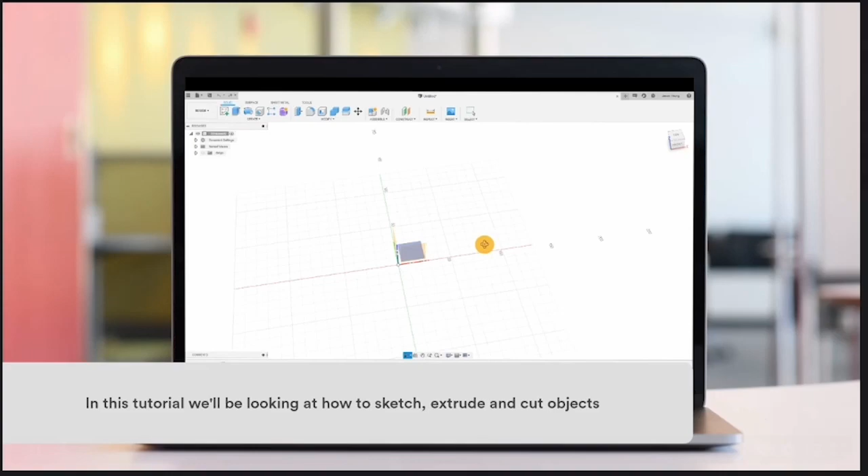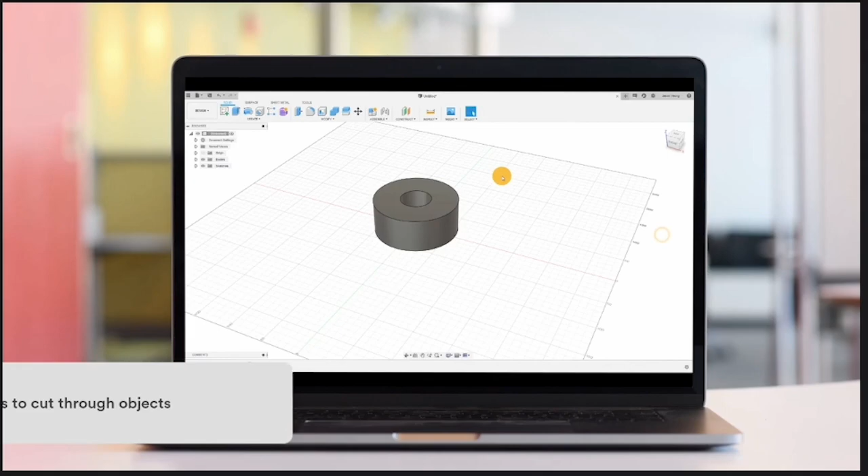In this tutorial, we'll be looking at how to sketch, extrude, and cut objects. Alternatively, you can extrude sketches to cut through objects. You're now going to follow a set of instructions to use sketching, extruding, and cutting to design a wrench to fit a nut and bolt.

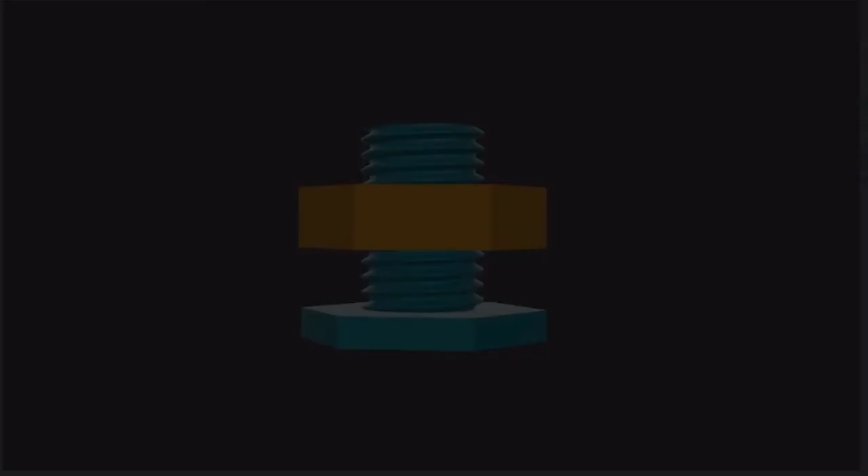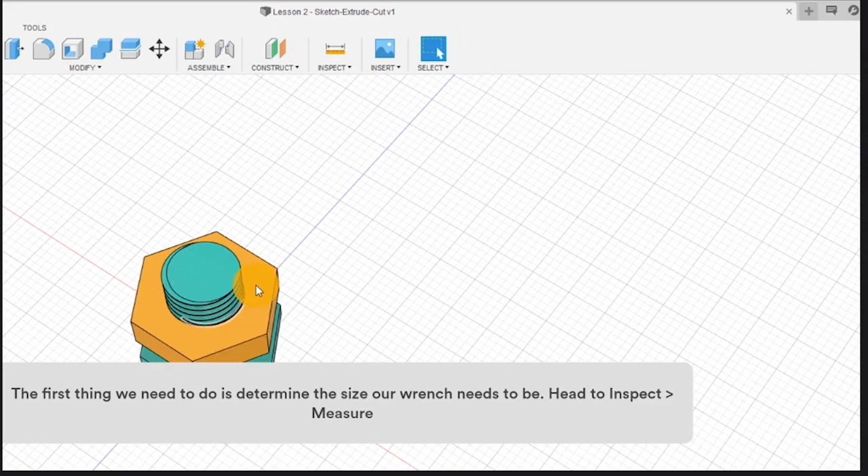Begin by opening up the Lesson 2 file. This is the nut and bolt we'll be designing a wrench for. The first thing we need to do is determine the size our wrench needs to be. Head to Inspect, Measure. Now click once on opposite sides of the nut. The distance between them will appear in the Measure menu, and it's 15 mm.

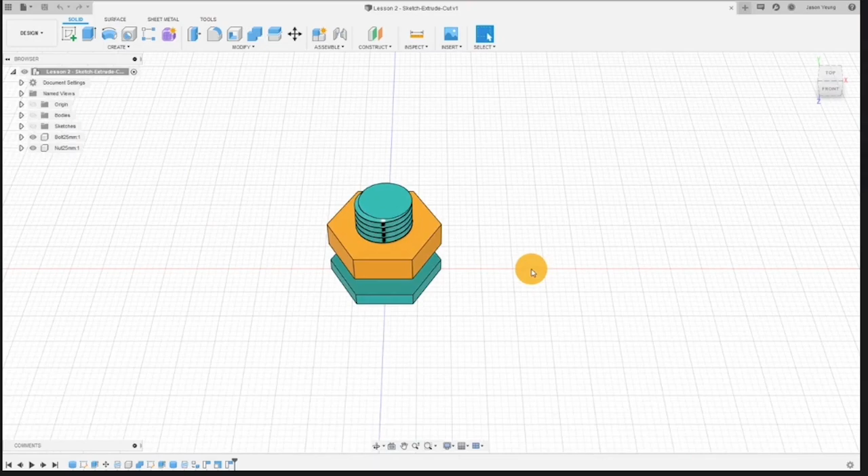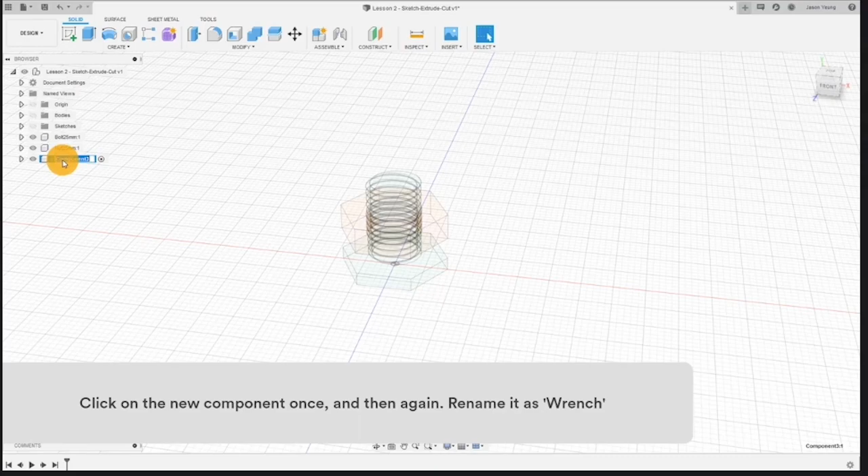In the browser menu, you can see there are two components, one for the nut and one for the bolt. Let's make a third one for the wrench. Right-click on the top component and select New Component. Click on the new component once and then again, and then rename it as wrench. You might notice that the timeline is now empty. The timeline will show previous actions on the component that is activated. Ensure the wrench component is activated and toggle the visibility off for the nut and bolt.

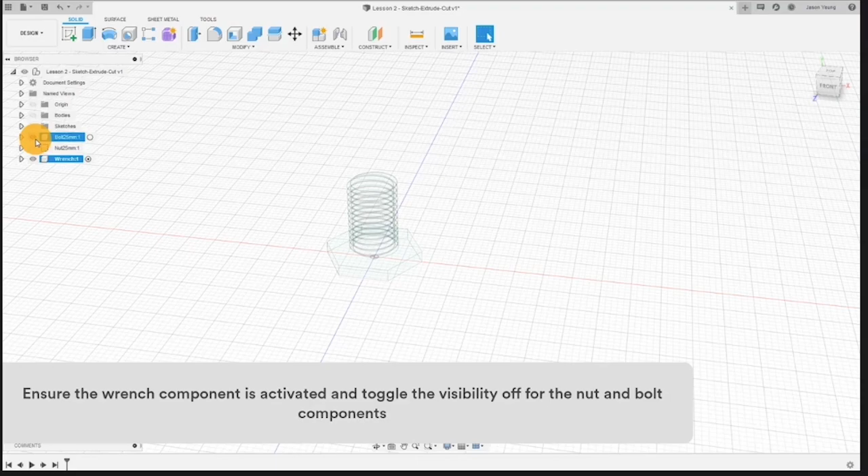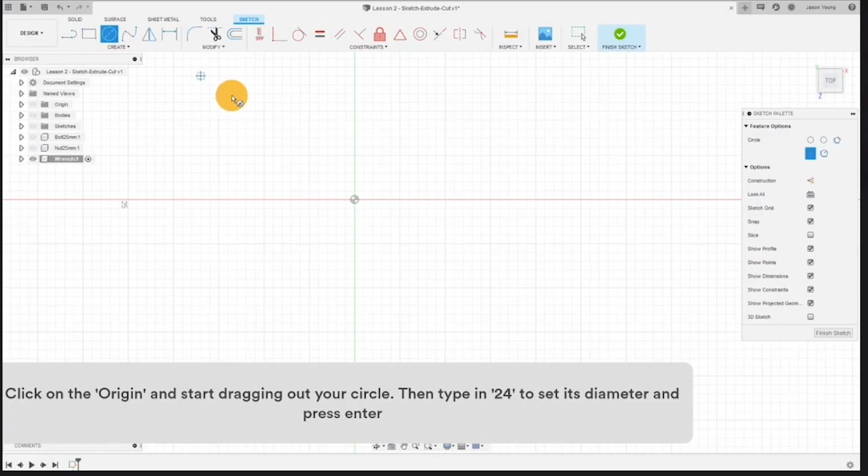Click Create Sketch, and this will prompt you to select a plane to draw on. Go ahead and select the top plane. You've now entered the sketch environment. Let's draw the wrench profile which fits around the nut or bolt. Select the Center Diameter Circle tool. Click on the origin and start dragging out your circle. Type in 24 to set its diameter and then press Enter. Notice how a dimension appears. You can always go in and change this if necessary.

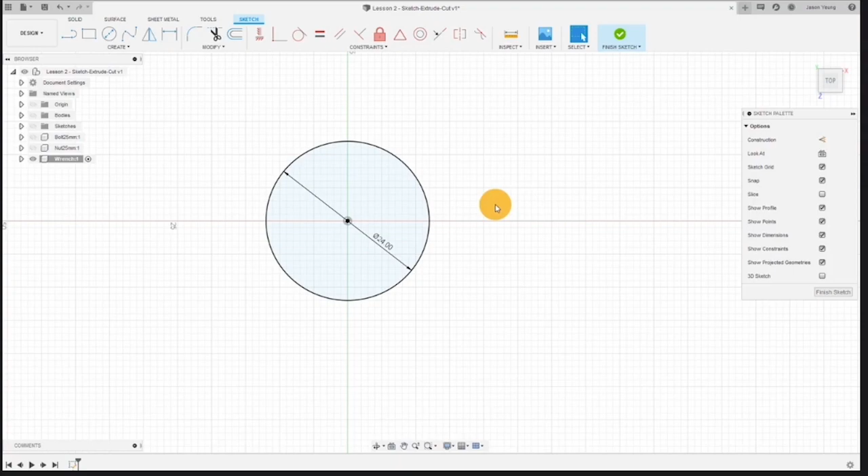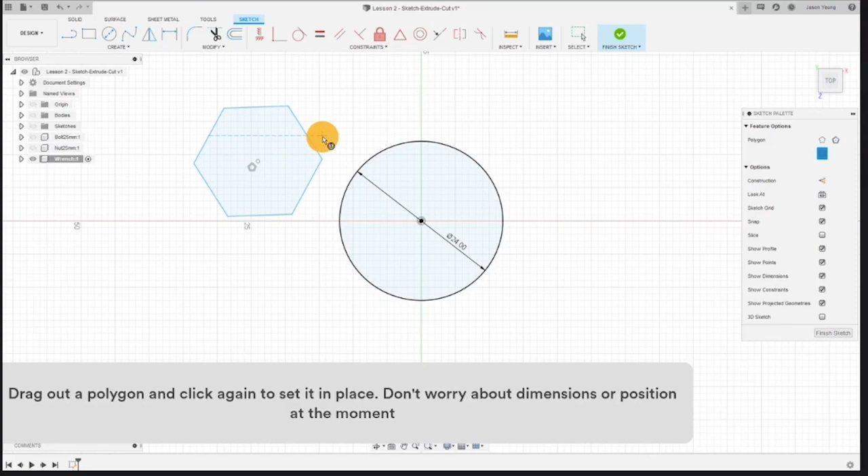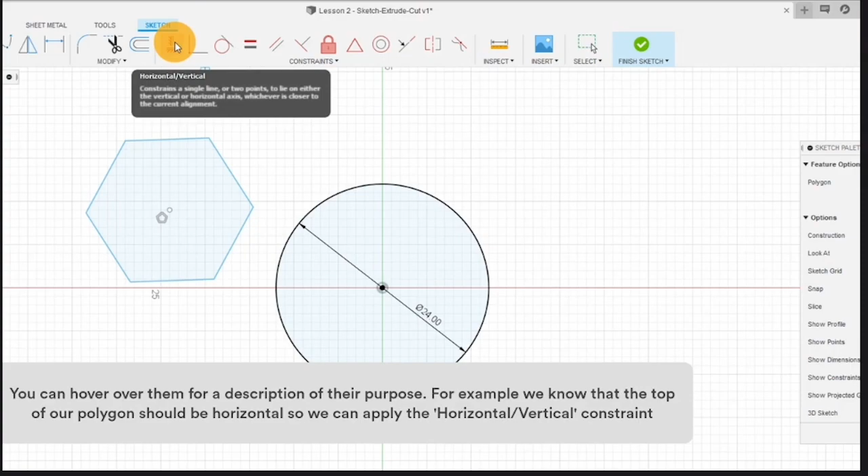Head into the Create drop-down menu and select Polygon, Inscribed Polygon. Drag out a polygon and click again to set it in place. Don't worry about the dimensions or position at the moment. These are constraint tools that help you to set relationships between elements of your sketches. You should use these as much as possible. You can hover over them for a description of their purpose. For example, we know that the top of our polygon should be horizontal, so we can apply the horizontal vertical constraint. We also know that the center of the polygon and the center of the circle should be on the same horizontal plane, so go ahead and apply the constraint by clicking on both points.

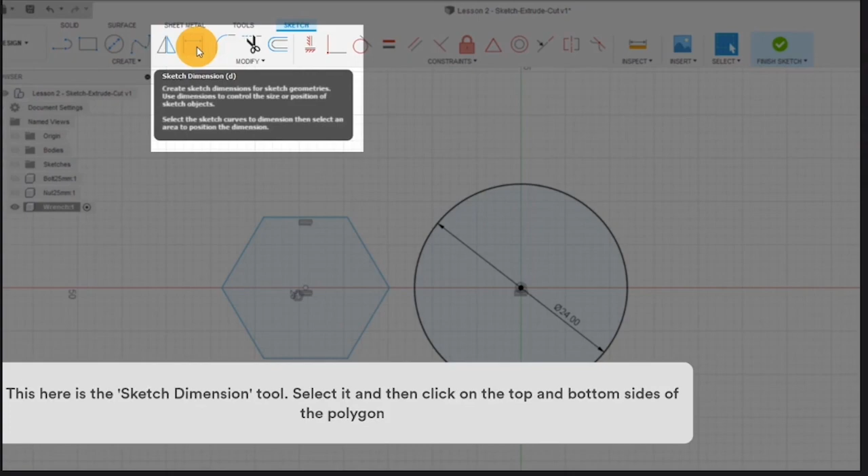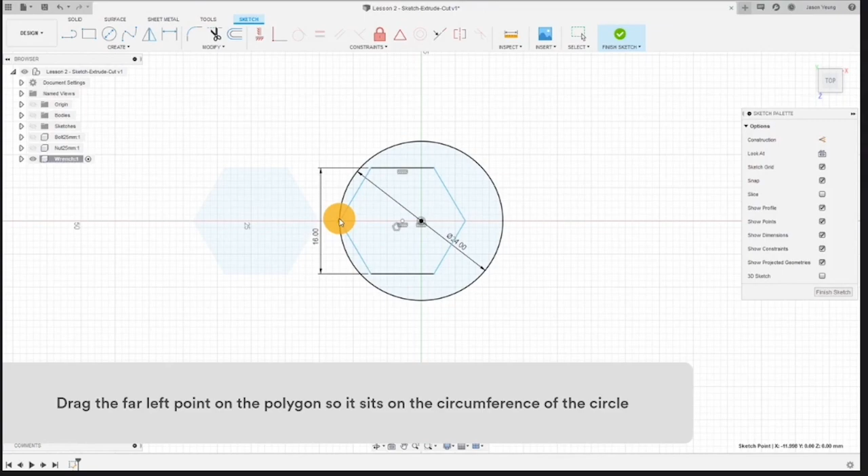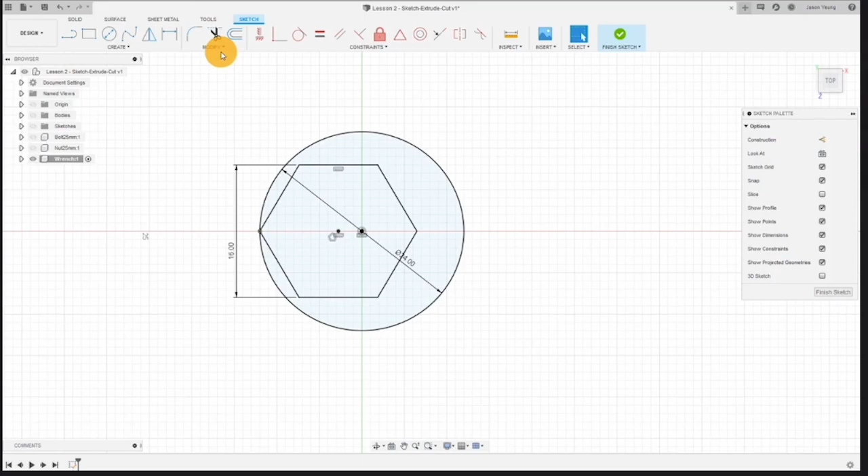This here is the Sketch Dimension tool. Select it and then click on the top and bottom sides of the polygon. Click to set the dimension in place and then type in 16, and this is 1 mm more than the length of the nut and bolt. Then press Enter to set the dimension. Drag the far left point on the polygon so it sits on the circumference of the circle. Click the Fix, Unfix constraint to secure the point in place. And notice how the sketch turns black, which means it's fully constrained, and this is something you should aim for in all your sketches. In the Modify menu, select Extend, and then click on the top and bottom lines on the polygon to extend them to the circle.

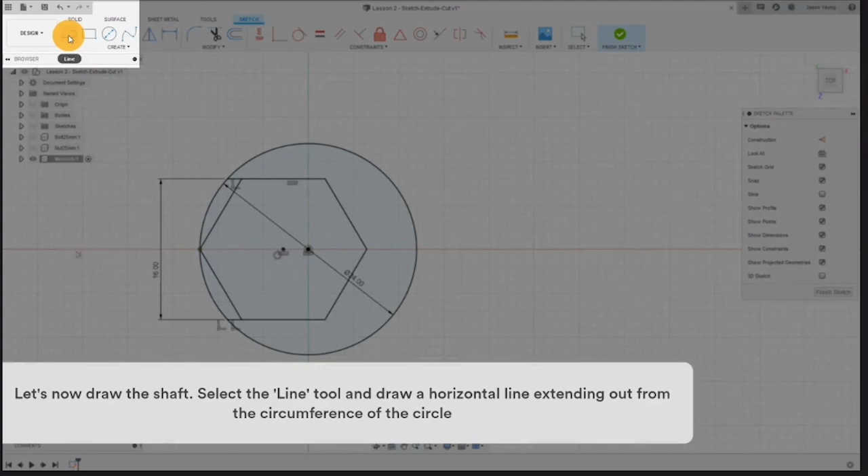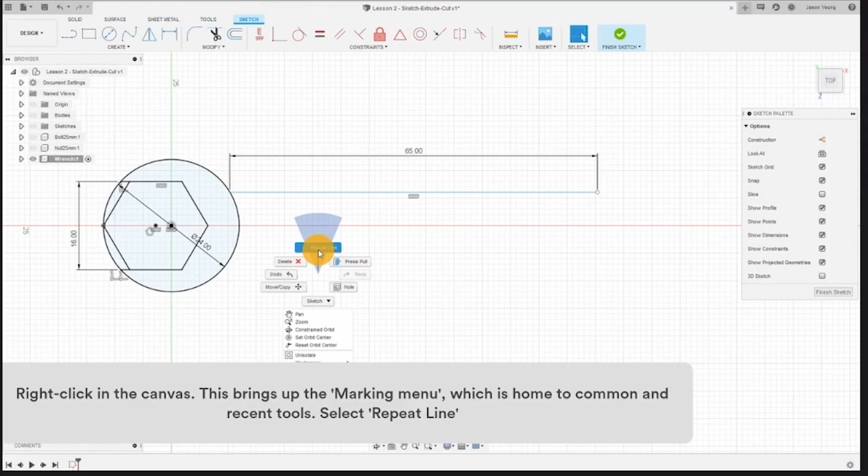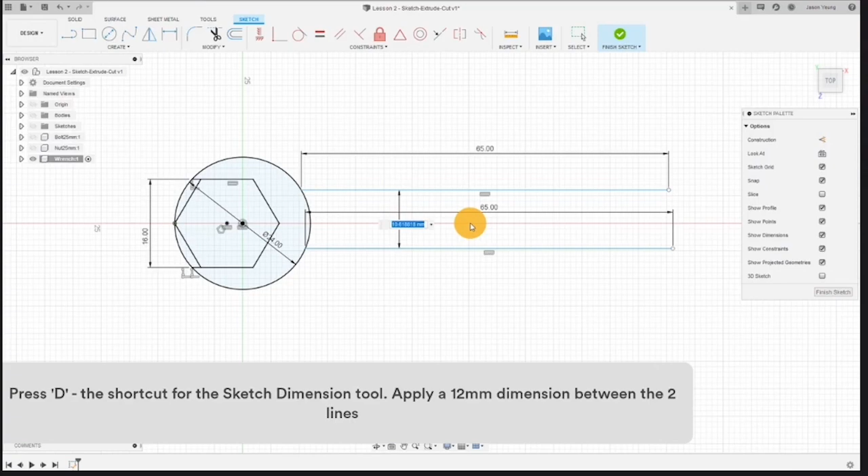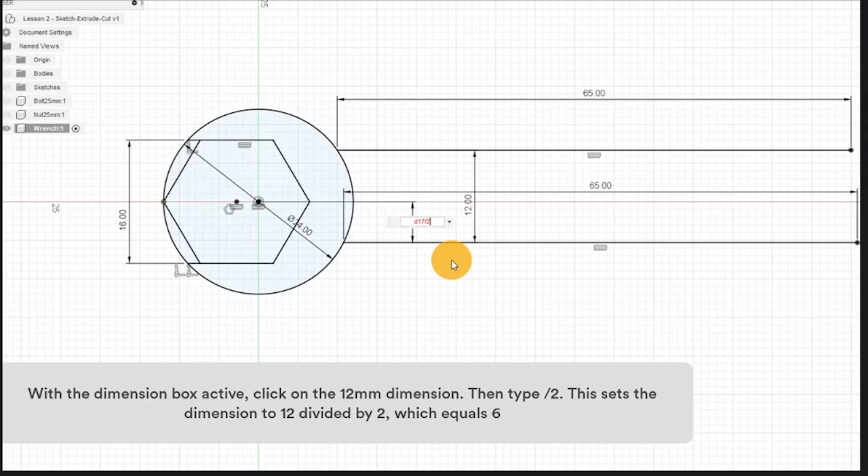Let's now draw the shaft. Select the Line tool and draw a horizontal line extending out from the circumference of the circle. Type in 65 and press Enter. Right-click in the canvas and this brings up the marking menu, which is home to common and recent tools. Select Repeat Line. Draw another horizontal line from the circle with a length of 65. Press D, the shortcut for the Sketch Dimension tool, and apply a 12mm dimension between the two lines. Now apply a dimension between the origin and the bottom line. With the dimension box active, click on the 12mm dimension, then type /2, and this sets the dimension to 12 divided by 2, which equals 6.

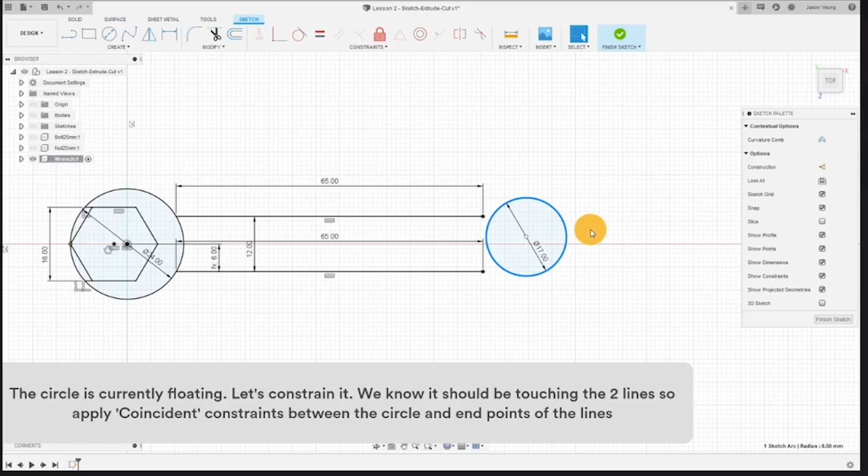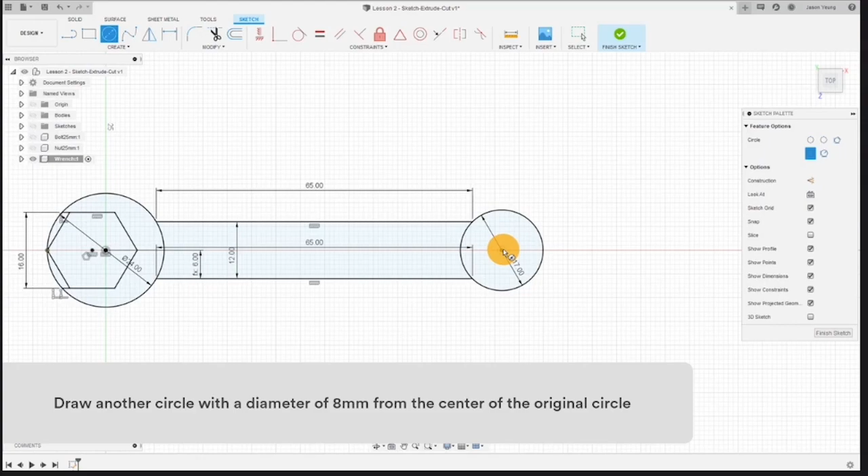Let's finish the sketch off with two circles. Draw a 17mm diameter circle. The circle's currently floating, so let's constrain it. We know it should be touching the two lines, so apply a coincident constraint between the circle and endpoints of the lines. Draw another circle with a diameter of 8mm from the center of the original circle. Great, the sketch is complete. Click Finish Sketch.

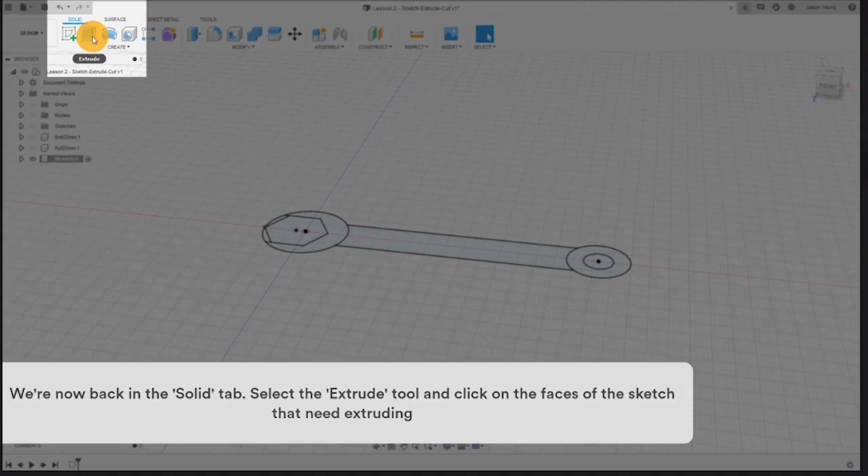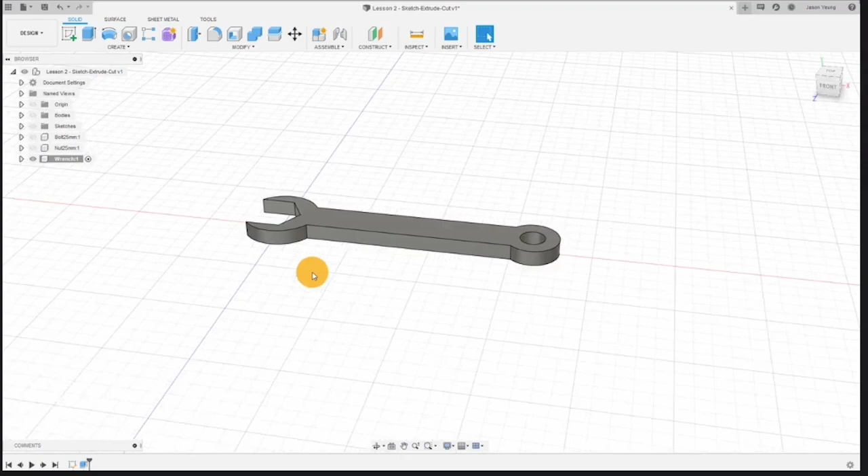We're now back in the Solid tab. Select the Extrude tool, and then click on the faces of the sketch that needs extruding. Type in 5 and hit Enter to extrude the faces. Then either press Enter again or click OK in the Extrude menu to complete the command. Congratulations, you sketched and extruded a wrench. Let's now use the Cut tool to embed some text.

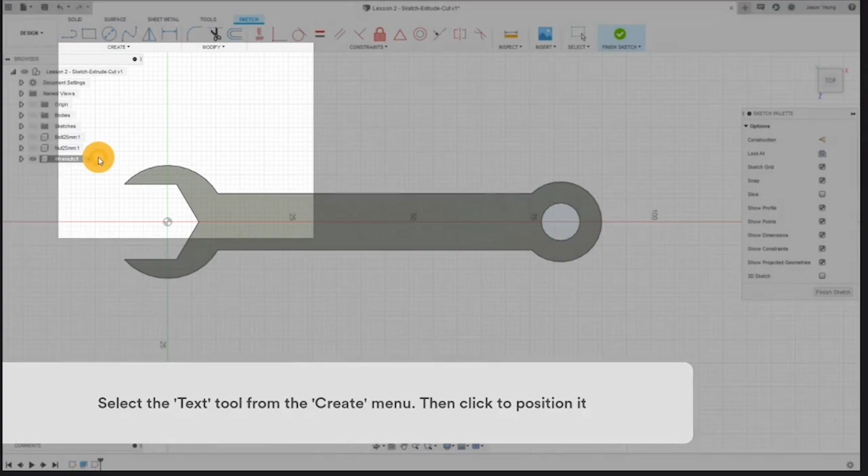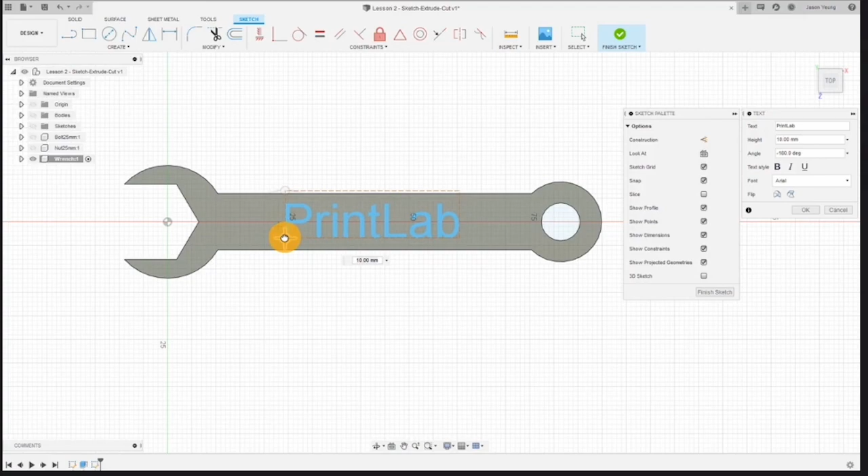Start a new sketch and select the top face of the wrench as the plane to draw on. Select the Text tool from the Create menu and then click to position it. Type some text into the text field. Use the manipulators to rotate and position your text. You can change fonts and sizes in the text menu if required, and click OK once you're happy with the results. Right-click on the text and select Explode Text. This turns it into outline profiles.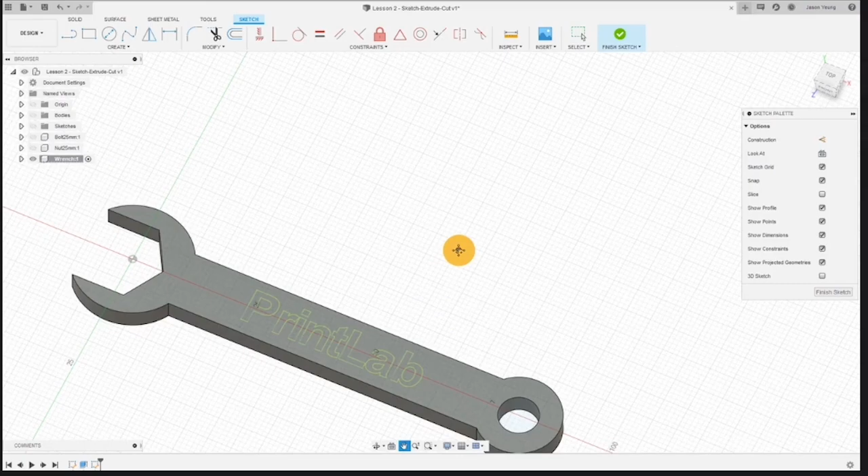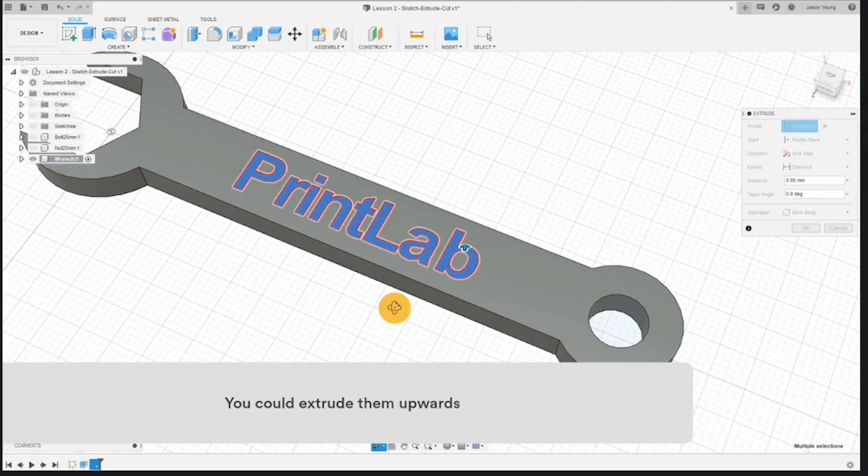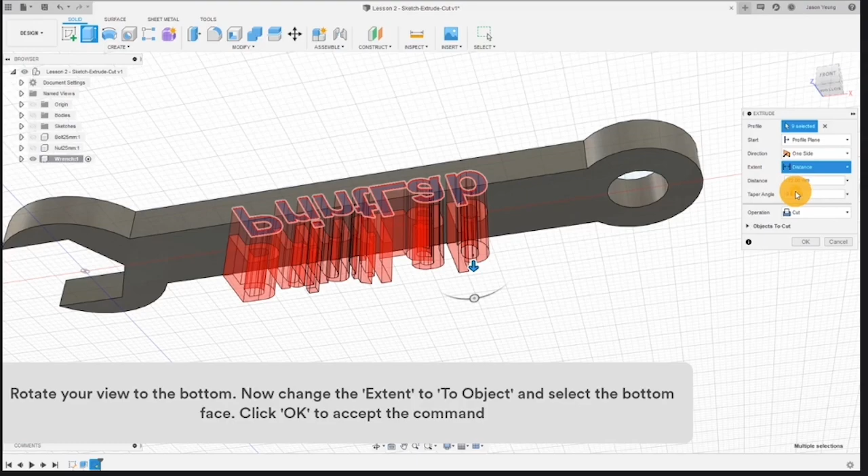Finish the sketch, and then activate the Extrude tool. Select all the faces of the text. You could extrude them upwards by dragging the blue arrow. But see what happens when you extrude through the model downwards. Notice it go red. This means that operation type has changed to cut. Rotate your view to the bottom. Now change the extent to To Object and select the bottom face. Click OK to accept the command. The cut will now be made.

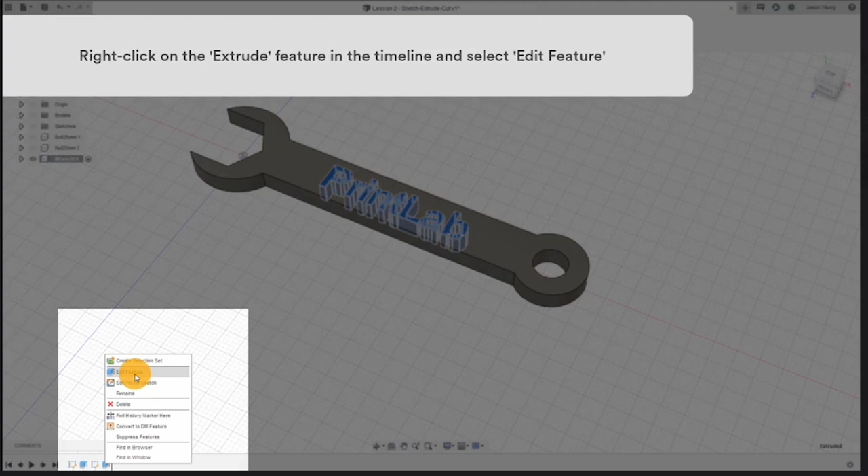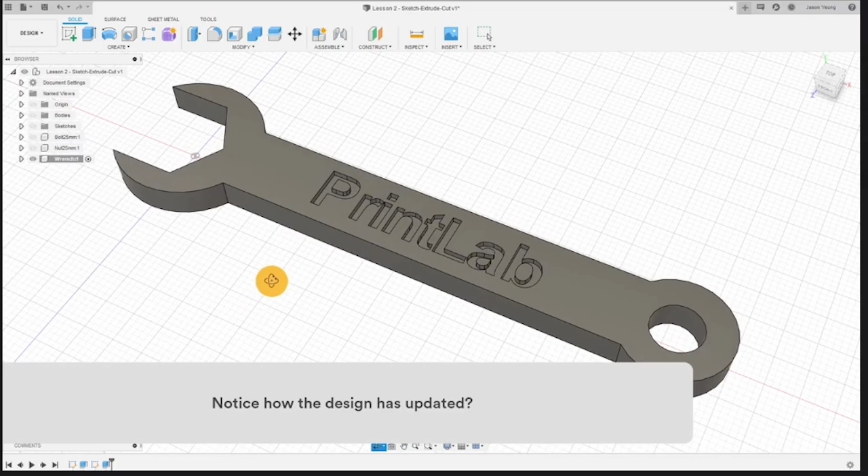Right-click on the Extrude feature in the timeline and select Edit Feature. Let's change the extent to distance and set the distance to -1mm instead. Notice how the design is updated. Toggle the visibility of the nut and bolt back on, and then activate the top component. Head to the top view using the view cube, and drag your wrench so it fits around the nut and bolt. It should have a small gap on each side.